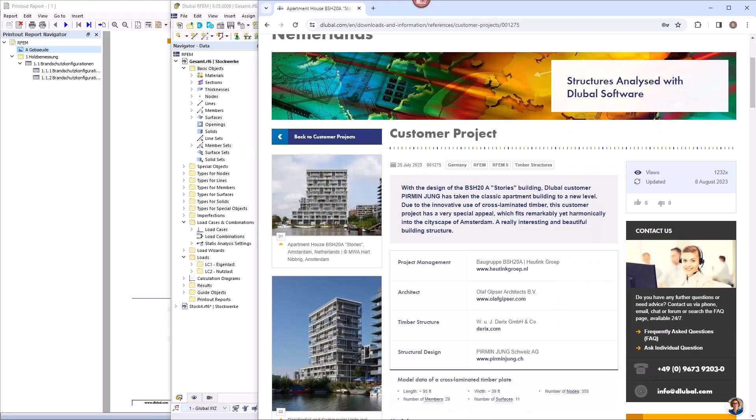I will shut off the camera and jump into the program. Before we jump into the program, the project I want to show you is also on our homepage under customer project. It was built last year. The static analysis has been done by the engineering company Pirmin Jung. They're using our software — that's the key.

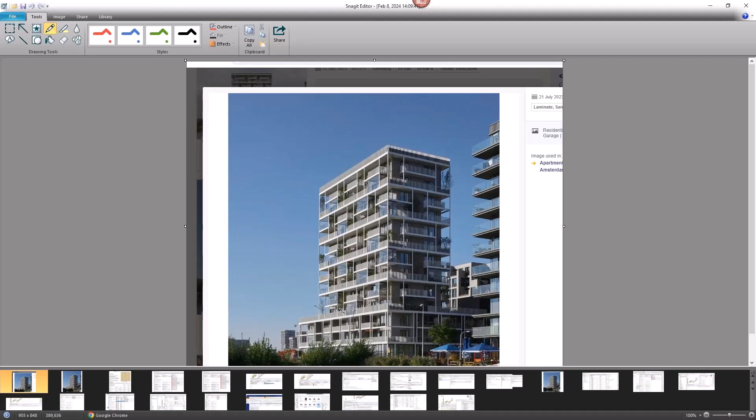This is the building, 13 stories. The point we want to take a look at today is that there is, or what makes the building quite interesting, is that there's a smaller part that is upon the bigger part, and we want to take a look at this story 3 here.

So how can you do this? You can first of all make it with model 3D and regard all construction analysis, stages analysis, all this stuff in the 3D model, or you can model it 2D, and then you have to connect each story via the option load transfer. This is the option that I'm choosing here today.

Today I'm only looking for vertical deformation forces. I'm not looking for horizontal forces for the stiffening of the system — I want to do this in a separate webinar later this year. Today, only vertical deflection and vibration, so wind load and earthquake we will not consider here today.

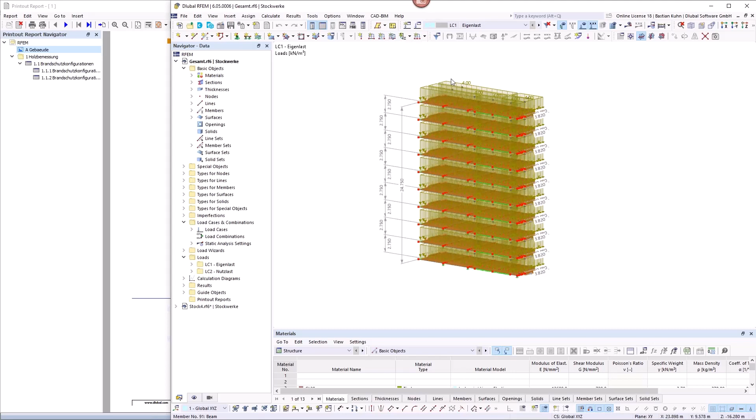As I said, I want to calculate that in a 2D structure, but with 3D effects. Just to give you an imagination of the structure, I copied the top stories 4 to 13 into a separate position, making a simplified load case there for the self weight, 4 kilonewton per square meter, and the live load 2.25 kilonewton per square meter in each story, giving approximately a height of 25 meters for stories 4 to 13.

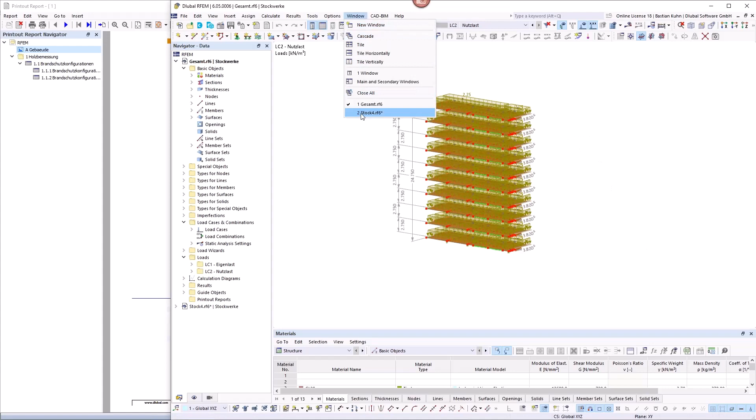Now, how can you get the force from story 13 to story 12 and so on? Therefore, I created separate 2D positions. Here is story 4, and I summarize them all — I want to show you that in the Windows navigator.

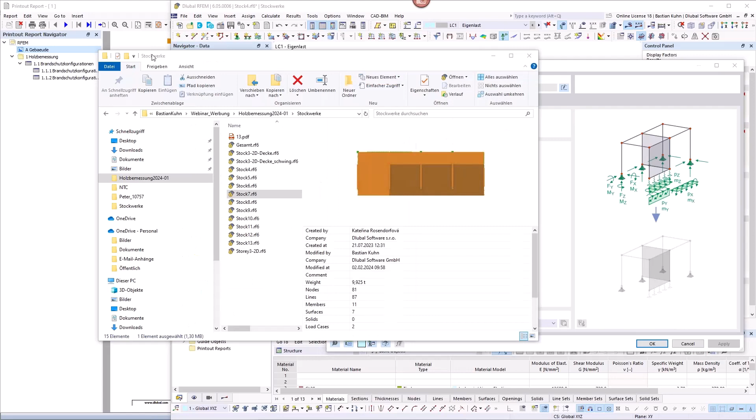So I have here story 4, story 5, story 6, 7, 8, 9, 10, up to 13, and connected the forces from the top story above story 4 via the function import support reactions. There I can say I'm connecting story 5, so the resulting forces from story 5 go into this position, story 4.

Then I can say in the model with story 5, I have support nodes, support lines, and I'm importing them to the current model right here. I can automatically transfer the load case from load case 1 to load case 1 in the new story, and so on — this is how it works.

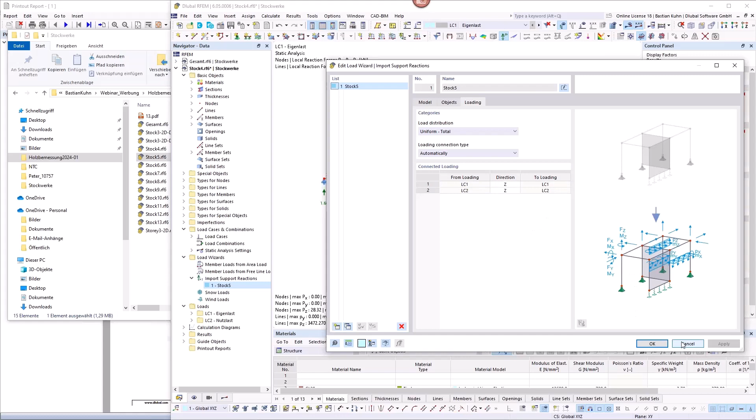I will put on the forces or the load, and here you can see that I have point loads and line loads, and if I activate it, I also have surface loads — this is, as I said, the 4 kilonewton per square meter for the self weight and the 2.25 for the live load.

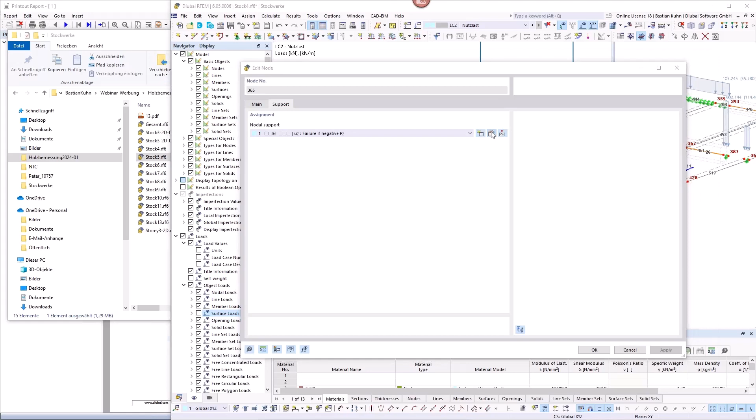But we just want to concentrate on the load that's coming from the other stories. You see here that in this part I also defined nonlinear nodal support behavior. It would also be possible to regard the settling or the construction stage via a spring constant in here. All these points would be possible to be regarded and still transfer the load from one story to the other.

Okay, now when we go into the position that we want to analyze today, I think it gets much clearer, because I know it can be quite confusing, especially if you have not seen it before and did not work so often with RFEM 6 before.

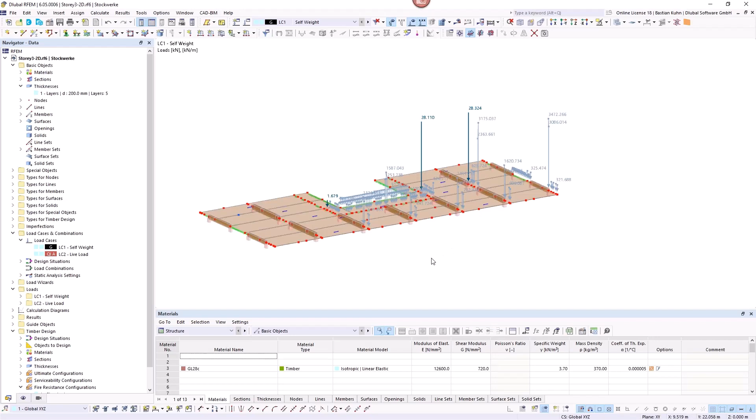You see here, I'm in load case 1, self-weight. Also here, when I activated the force in the first load case, 4 kilonewton per square meter, and 2.25 in the second load case. These are the only two load cases I want to analyze today. I said it is a simplification today.

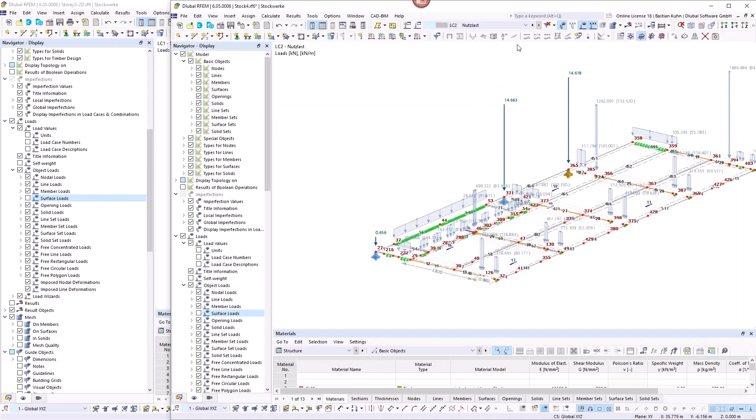Okay, I think the easiest way to regard that, or to understand what I'm doing here, is to take a look at the point load. So we have 1.68 here and 28.11 there. Now when we look to the previous model from story 4 and take a look at the reaction in load case 1, you see that I have 1.68 here, and if we turn it around, 28.11 here.

So that really is the load transferred from this model into the other. Maybe we take a look at the line load here too. So 591 here, and then I think it should be enough. And right here, you see also 591. So yeah, that fits. The load is correctly transferred from story 4 to this part that we are analyzing here.

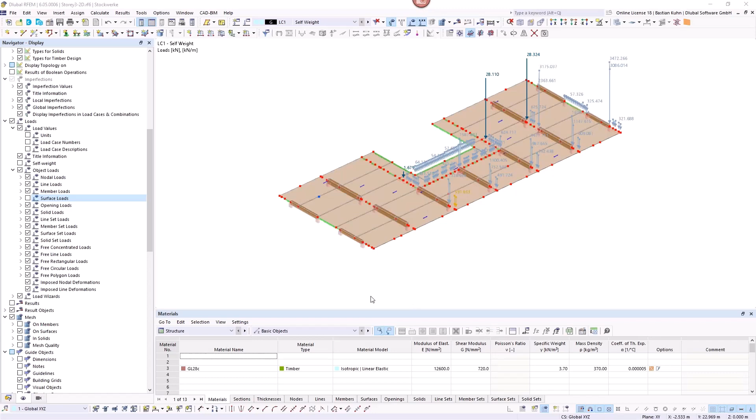Okay, to the structure itself. Now that we have such a whole bunch of questions already, it's hard for me to follow them all. All right, there they are. I would like to show you also the dimension of this structure that we are analyzing today. Therefore, I just shortly switch them on. It has a length of nearly 30 meters and a width of 12 meters.

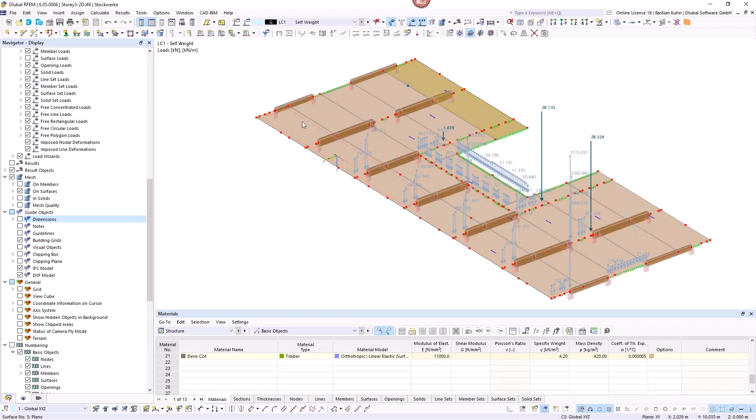I have several CLT plates in here. They are divided in an order so that they can also be produced and brought to the assembly. That's essential, that this is possible. And they are connected in between those connecting points via screws, and the screws in our software are modeled via line hinges. There's another webinar where I get into this much more detailed and also use a script function to calculate them. But today I just took the spring constant over from the existing project. So in X and Y direction, I defined this spring in here. So that's why it's connected.

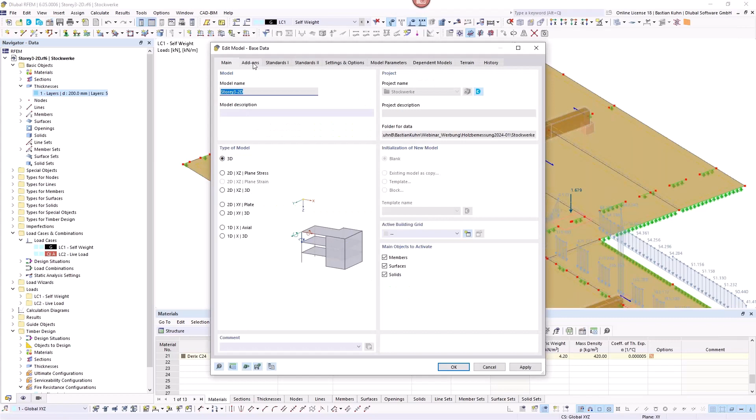The CLT plates themselves I generated with our add-on multi-layer surface. Maybe I go a little bit into the base data here. So it will be this add-on multi-layer surface, and I'm designing all this stuff in the add-on timber design.

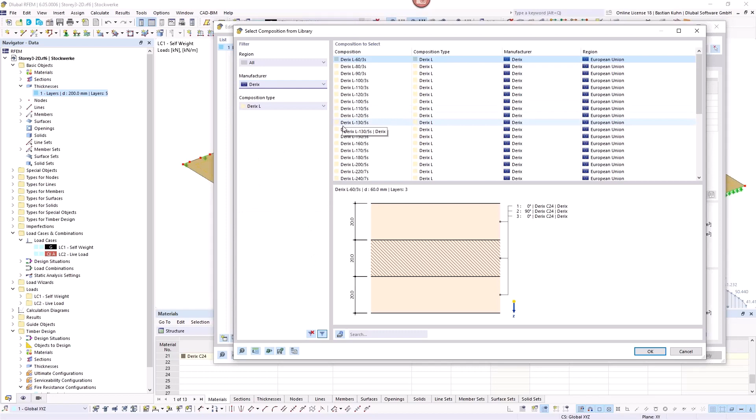And when I defined this layer, I have a database here with all the producers that we are offering right now. So you see, it's even possible to have a producer from Switzerland, maybe not this one, Schilliger, for example. But of course all the European producers. And if you want to design in America or North America, Canada, then you can also have producers from there. Right now here, I choose the plate from the company Derix. And this gives me a certain amount of stiffness. I have other options here to regard the failure of net sections and failure in glued contact surface.

This is once again more for the webinar of the stiffening system for horizontal load, and I don't want to regard that today. But what I want to show you is that these layers here will generate a stiffness that we export into RFEM. So you see that this stiffness, if we're just looking for the top bending elements in here, D11 is way more stiffer than D22. So the stiffness in X direction is higher than in Y. That's timber, right? Obviously, there's nothing so fancy and new.

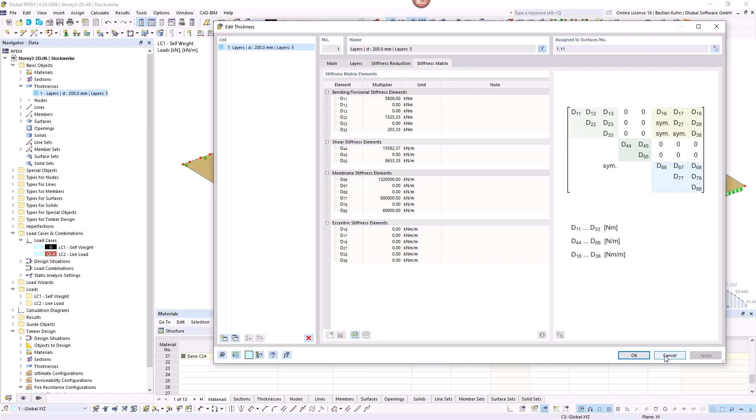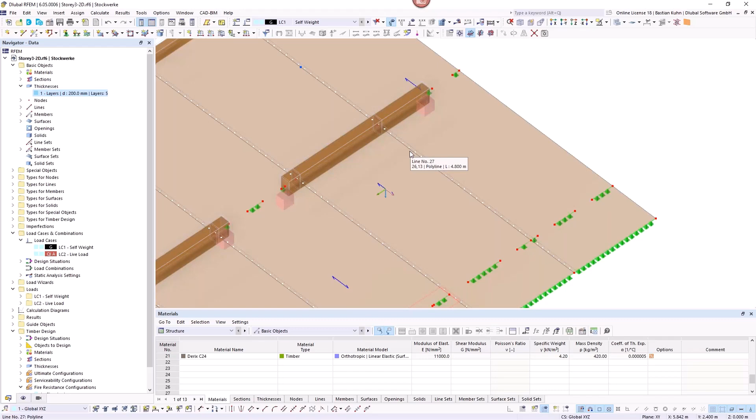But now when I'm working as a designer and constructing it, you probably already realized the blue arrows here. It was in previous versions always hard to know how I'm assigning the plates. If we look for the downstand beams that I have underneath those plates in here, you see that there's a downstand beam supporting this plate and this plate and this one. Because of this connection point in here, it would not be possible to design it economically without this part. That would be quite hard. At least with screws, it can be a problem. And therefore, this beam was arranged here. It's a continuous beam from this point to this point.

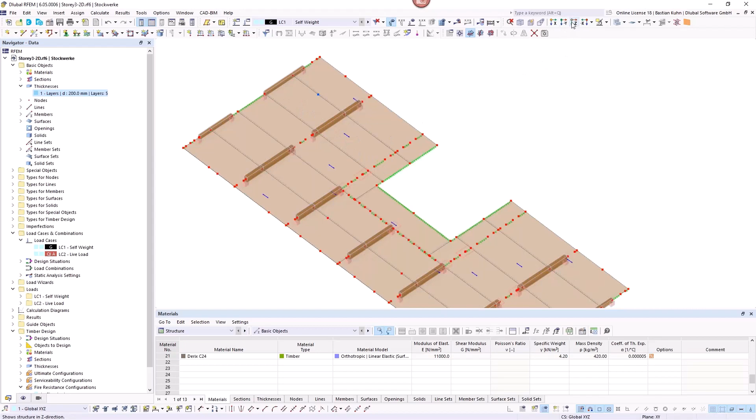And now when you want to arrange the stiffness, you probably say, okay, I have the span in global X direction. That's where I want to arrange my stiffness. So it's completely right what we did in here.

And we can also have it much more detailed if you want to look at each layer. I would just directly jump back to the thickness again, or maybe I can even have it here and then jump. So you see my first layer is oriented in 0 degree. The third one is in 0 degree direction, and also the fifth one. And this is then the red arrow here. And the soft layers of the structure, which has less stiffness, is then this direction.

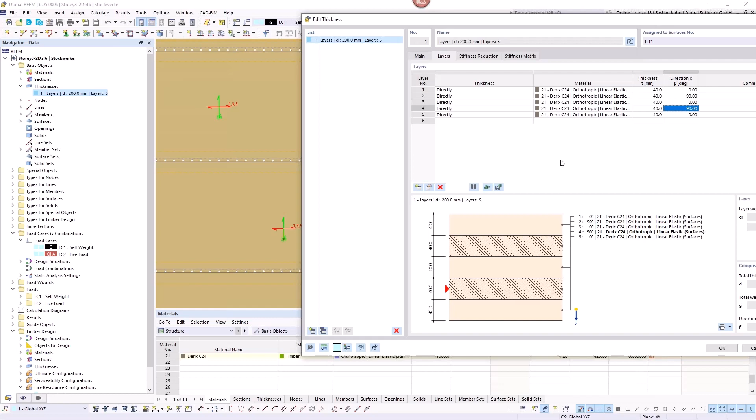So I don't want to get too detailed in it, but in a CLT plate, you always regard the stiffness in X direction. And because of the orientation of 0 and 90 degrees, you still have stiffness in Y direction. You saw that in the stiffness matrix.

So what I actually wanted to show is that you will directly get very comfortable with the stiffness direction, and then as a constructor, you can directly see, okay, here it's correct to orient it this way, but here probably not, because there I have supports completely here over the whole length, and I also have supports here, and there I definitely want to change that.

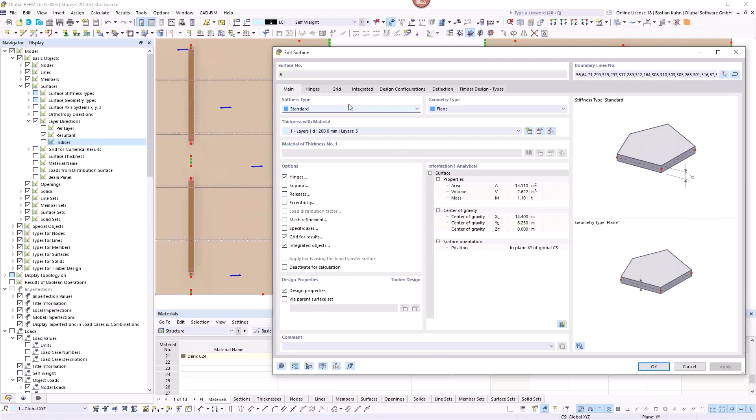How can you change this? If you assign a specific axis and define it here by 90 degree, the whole composition is changed and you see it directly that the stiffness works.

All right, that is the plates. I also defined supports, well, just simplified, also only vertical and movable in X and Y direction, because I think this is, as we are only looking for vertical forces and deformation, this is okay.

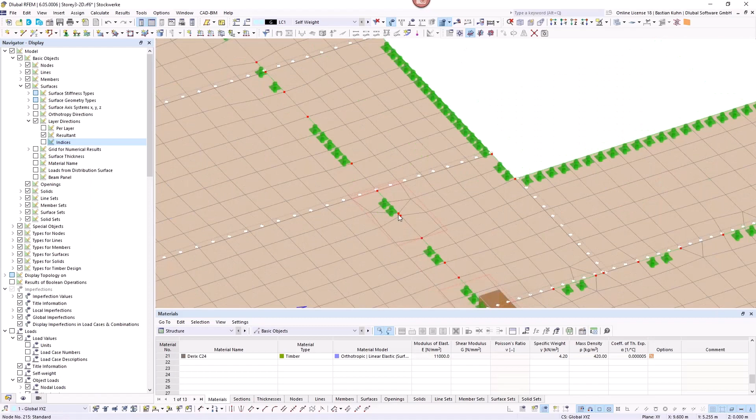I will generate the mesh just to show you another part of what I made in this model. I did take the whole load, once again the example of the point load of 1.67, and defined it with a tiny little eccentricity to the support. In reality, when you are constructing this, you probably do not assign it to this node. What's the number? 439. You would probably assign it to node 215. But I did it this way, and this will definitely give you a singularity, which will never occur in real life. And either you can put the force directly to this node, or if the distance gets bigger, there's also the option to define a surface result adjustment.

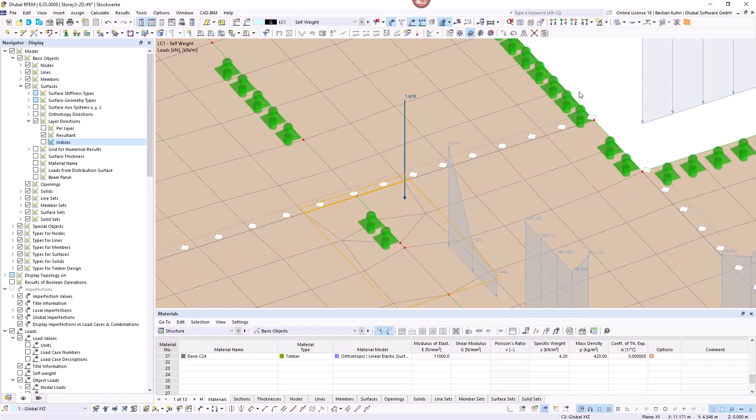This is what I did in here. And I use this surface result adjustment wherever I have these problems. But I want to show you with this the advantages of this 2D system. When I have it in 3D, it could be quite a lot more work to regard it. And also when you say, okay, a downstand beam here, maybe I don't want one, this would also be easier in this position.

Okay, we switch off the load again and come to the beam forces we did. The beam is supporting the plates because they have connection points in here. Otherwise, it would not be possible to assemble them, or to produce them and assemble them. Both would not be possible. And of course, the engineer divided the beam at these connection points. It is not necessary with RFEM 6 to divide it, but he did it.

And now, how do you regard that as a continuous beam? You will use the option member set.

Okay, when we are already in member set, we can directly take a look at the design types of this beam. We don't want to look for stability today, as we do not have any kind of buckling. And we could also argue that for lateral torsional buckling, it does not play a role here because we have constructive fixing on the top of it, so this will not occur.

That brings us directly to the design configuration. Well, the ultimate limit state configuration is then also not so much to do. You can consider the system strength factor. That would be something probably quite relevant in case we get right to the borders of the loading with the members. As I said, stability we do not do, and we have also the system strength factor for the surfaces.

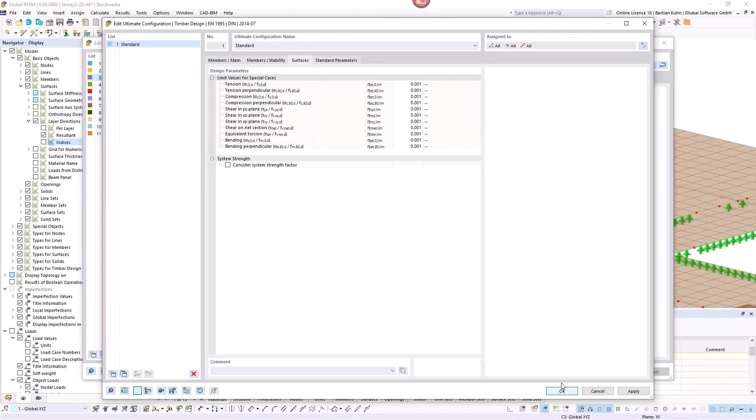So it's always divided into ultimate limit state, serviceability limit state, in the definition of member and surfaces. It's more or less the same what you input here.

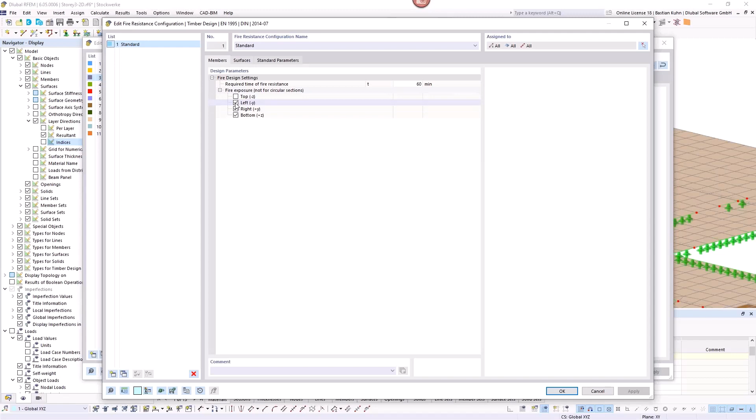Fire resistance verification configuration, that is the new point I want to show you for surfaces. Therefore, I will not show that in the members right now. For the member, I want a required time of fire resistance of 60 minutes. And because it's covered on top by the plate, I skip that and say it's only burning left, right, and bottom. And 60 minutes, that's what I'm defining.

Then what else can we define for the beams? We can define a member support at the member start and end in this case. Here I said, okay, I have a support length of 30 centimeters, which is quite long.

Possibly you want to reduce that later on. I'm using shear force reduction that I can always activate. In case I have a shorter support length, I would maybe also want to reinforce the support via screws or with a user-defined strength. All this would be possible. And in order to regard the softwood, I can also increase the factor KC90 by the factor 1.5.

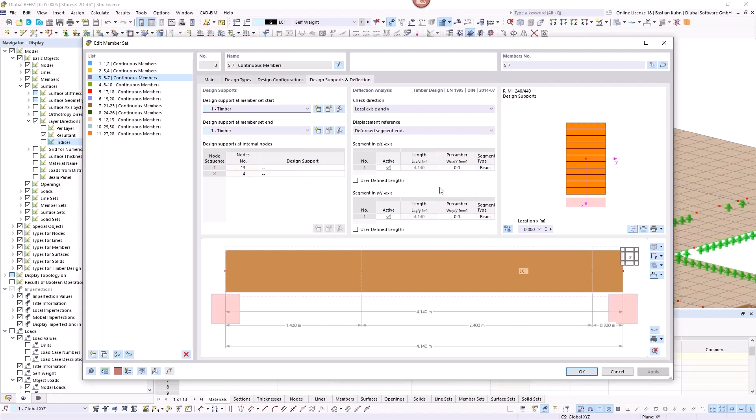Deformation is nothing I have to do much special on today. I'm just using the reference lengths. I will come to that when we look for the surfaces. And we will take this one here, this surface, and take a look for the design configurations again.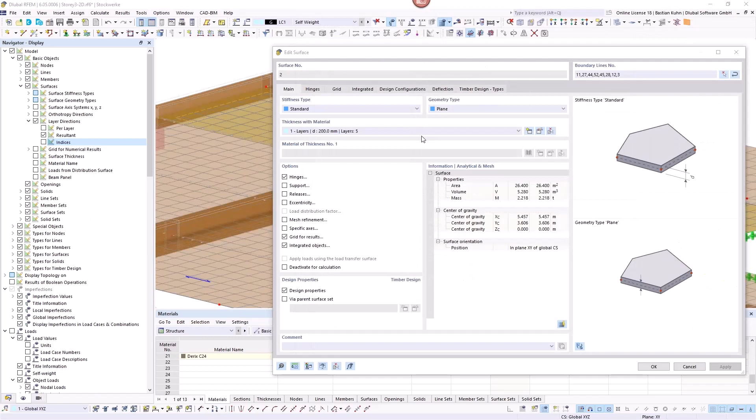The information on the thickness I showed you already, just so that you know what we are defining here. We have these reduction factors in here, which play a significant role for the design. That is all transferred into the stiffness of the structure. Okay, ultimate limit state, serviceability limit state, I showed already. There's not much special to say, but fire resistance.

This is the main reason that we are doing this webinar here today for you, because we are really happy that we are able to regard fire resistance verification for CLT plates now, and we can regard it correctly with correct reduced stiffness and all these points. I will come to that once we did the verification or have the verification ready.

So I'm saying I want a required time of fire resistance of 90 minutes, which is quite long. And the default setting here is non-heat-proof glue, not the glue, but the adhesion of cross-laminated timber, which means this is the standard glue taken by the producers. So be aware to take this one.

And the burning rate that we have in here, we can also control that in the standard parameters, and it's probably quite interesting to take a look into that. The burning or charring rate is for cross-laminated timber similar to softwood, 0.65 millimeter per minute.

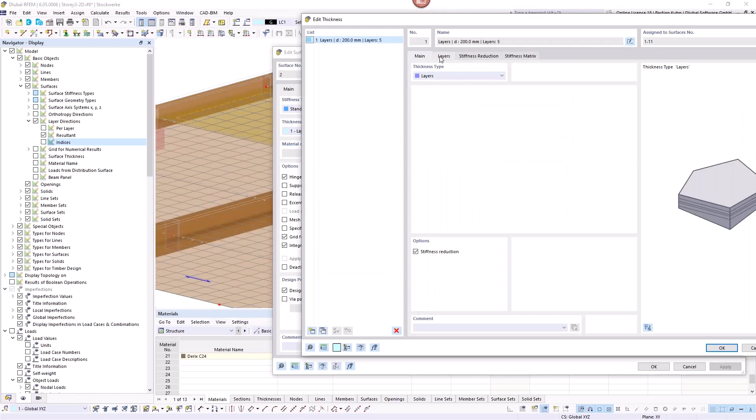In case one layer of the plate is burned nearly completely, maybe we take a look at the layers again. So if you say, okay, the bottom layer here, where I am with 4 centimeters thickness, is burned completely, then of course it cannot bear any force or stress anymore. And then there's also the rule to say, okay, when it's burned equal to or less than 3 millimeters, it has to be completely skipped out of the design for the stiffness and the stress.

So that's quite important. Okay, and we want non-heat-proof adhesion. The fire exposure, well, that's now quite similar to what we had for the members. On the top, I probably have some kind of planking or whatever. On the bottom, that is where I want to do or have the fire resistance verification.

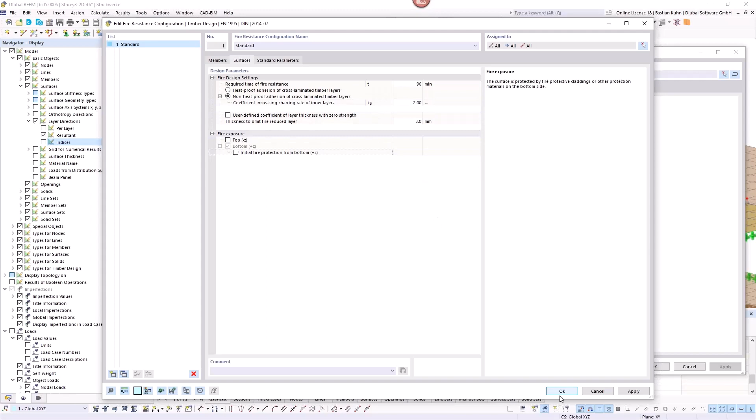In case the bottom is also planked by, for example, gypsum or something else, you can calculate an insulation coefficient according to, once again for example, the planking thickness, and then the factor K2 should be less than 1. But here today we say, okay, I'm working with this and we will try this one. This is the very important fire resistance, and we will do the combination, do the design, and then come definitely back to this configuration and take a look on it again.

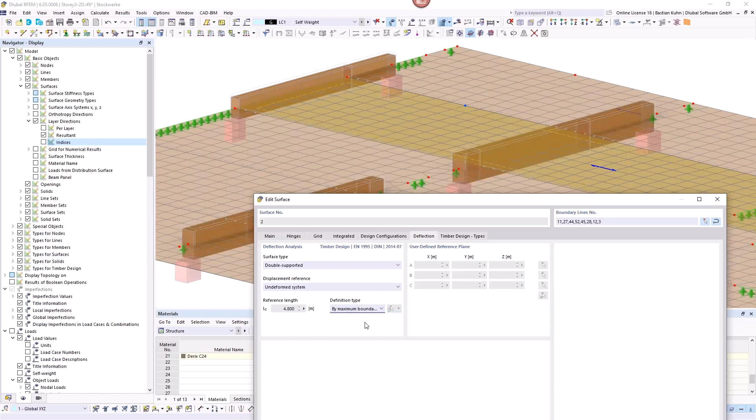Deflection was predefined with the maximum boundary length, which is all right in here. It's from this to this point, 4.8 meters. Of course, and in most cases you would want to have it, you can also select a length, but you see here this line is 4.8 meters, so you can really take it this way. Okay, and the service class is similar as for the downstand beams, 1 in this case.

This is the point, and we will get to the combination. I hope I did not miss important stuff, but I don't think so. Okay, we're doing a combination according to Eurocode 5 with the German annex.

Of course, a whole bunch of other annexes are possible, and a whole bunch of standards for any other country is possible here. Once again, we have only load case 1 and 2 for sake of simplification.

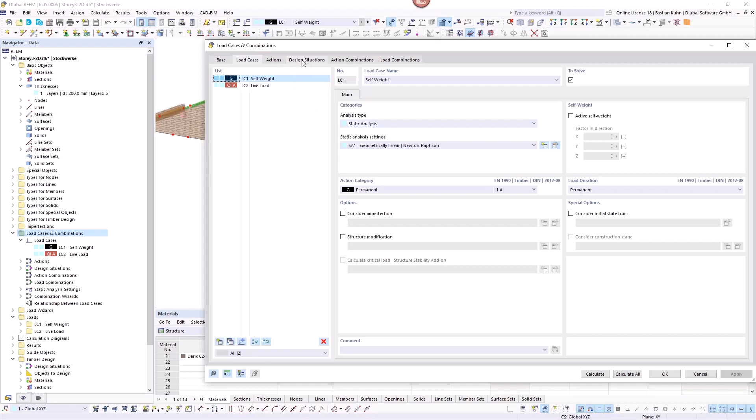Design situation is predefined with permanent for ultimate limit state, and in Germany we have 3 combinations for serviceability limit state: characteristic, which is the initial deformation of the structure, and quasi-permanent and characteristic quasi-permanent with regard to the creeping. So these 2 serviceability limit state verifications will also regard creeping.

The creeping you can define in the basics with settings for timber structure. In case your structure gets nonlinear, you have to regard the creeping factors in stiffness modification, but we do not have this case here.

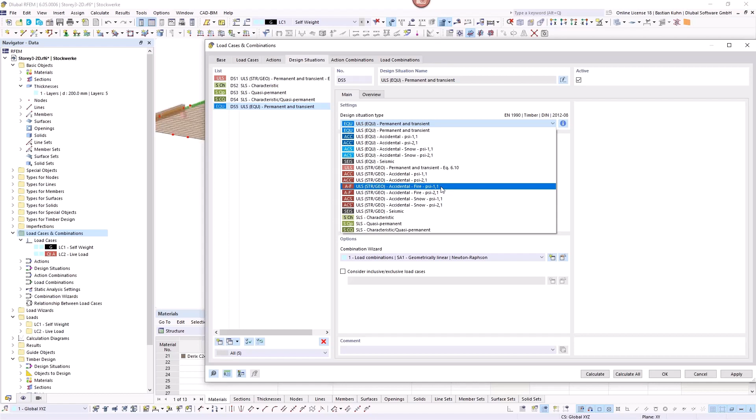And of course, we also want to do fire resistance verification. Therefore, once again, in Germany, it is recommended to use the accidental combination for fire with Psi11, which means that your factor Psi11 is put in front of the summation.

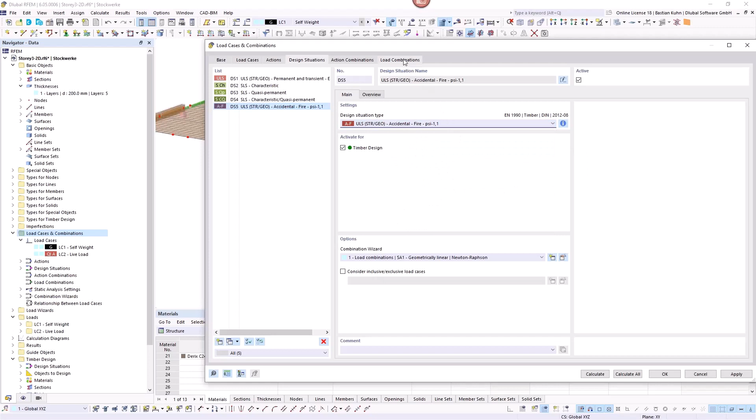But of course, it's also possible to use the other summation where you have it in the summation of it. This is the one we are using here, and then we can do our combination - quite short, not much to combine when you have only 2 load cases.

The only thing left to do is go into the timber design and say what you want to verify. We want, once again, verify ultimate limit state and serviceability limit state. Here is correctly assigned the accidental fire, vibration we will do later on.

I let the software now calculate, because this gives me the opportunity to show you the printout report a little bit more detailed. But maybe you already asked yourself, okay, it's nice that I can connect several models within one model and have the forces from all of them, but how can I do the documentation of this?

I mean, I cannot say to the other engineers, I magically just have the forces somewhere here. You probably need the documentation for this. And that is what I want to show you during the calculation.

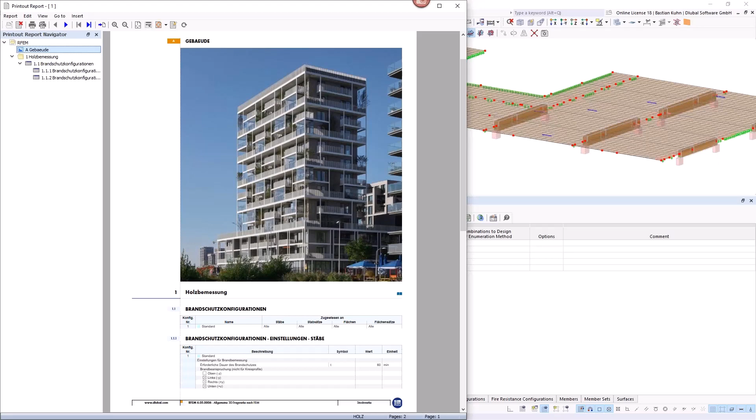Here I'm opening again the model with story 4. And here you have an option - what you definitely want to have in your documentation is the reaction force from the story and probably a whole bunch of other parts, but I don't have the aim to make you a complete printout report.

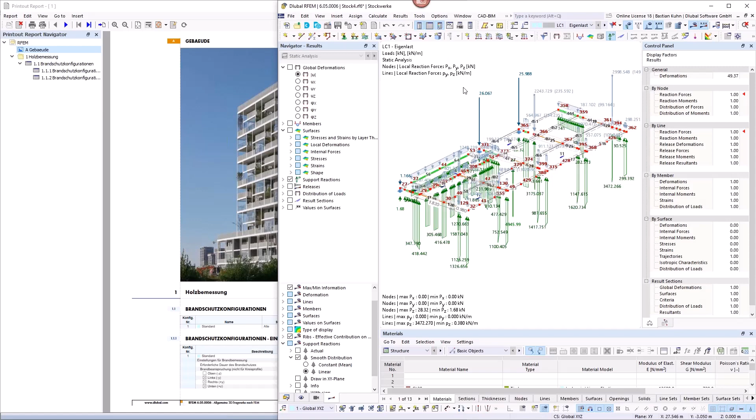I just want to show you how to connect several parts of the other model into this one. So let's say we have this story 4, and once again, this is connected to story 5, 6, 7, 8, to all the other stories. This is something I want to print to the clipboard. Then when I go into the printout report from the model where I'm working on, I can say, okay, this is from story 4, say okay, and have it imported.

While it is loading, I can, for example, open another model. Let's say this one - maybe not so interesting to have, but let's say we want this with 25 meters and each story also into the global printout report. You can have that here.

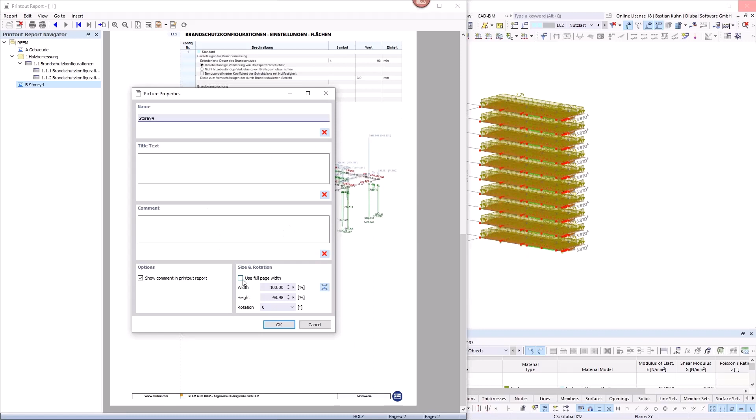Of course, right now it's not over the whole front, so this is something you always can change via right-click properties, maybe no comments, whatever. So this is all possible.

And one other point that is possible is to say, okay, I don't want to have it from another model, I want to have PDFs and unify them into one big printout report. This is also possible in here.

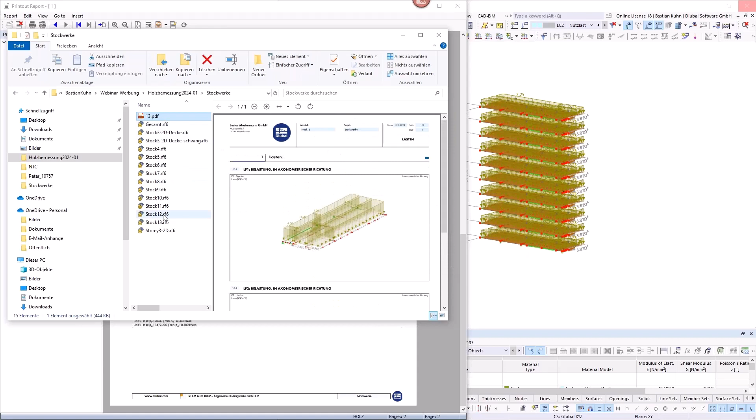For example, I'm just copied the load from story 13, so the top story. And when I go once again, insert PDF and select this one here, go opening, and for example, I say all pages. There is a whole bunch of options. Import it, and then I also have this PDF inside it.

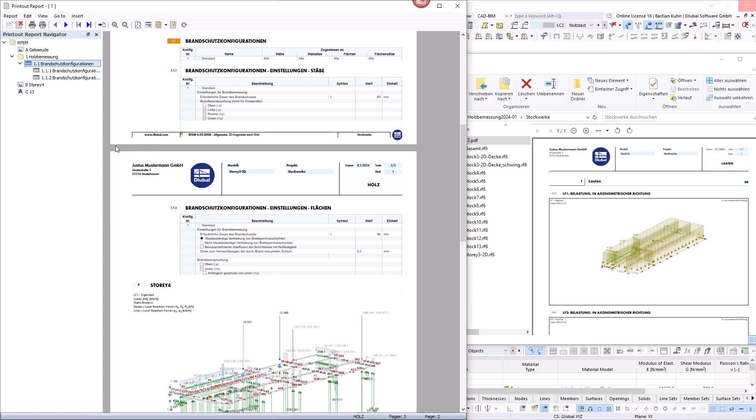These are the options we have for the printout report. Maybe just, I don't want to take a too detailed look into the printout report, but of course, when you go into the settings of it, you have all options to, for example, regard the fire resistance configuration.

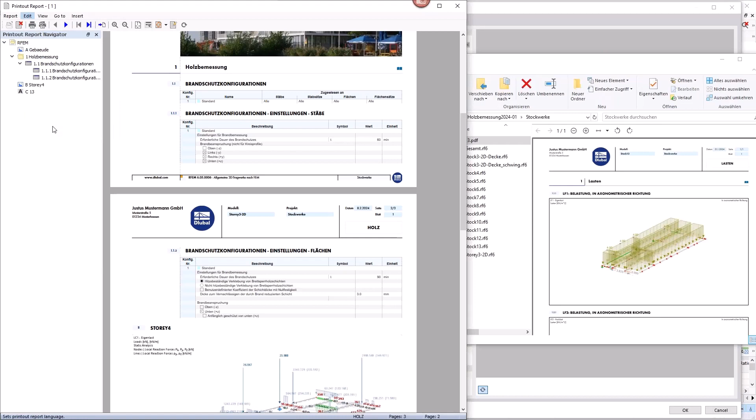Oh, sorry, this is in German, this was my fault. Once again, so we probably should change the language into English. But this is also possible, similar to the software - it's also possible to change the language.

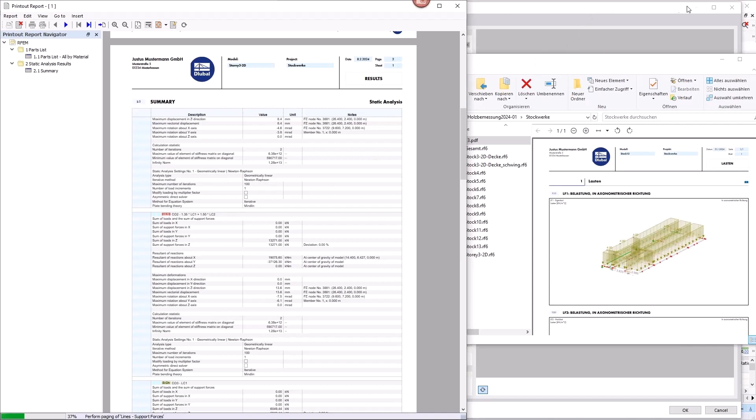Yeah, that's because - so here you see, now it's there. And we have the language in English. So that's also possible. Okay, so that we don't need.

I think the calculation is now ready. Yes, so that's fine. Now this is loading all the points to the printout report. That was maybe not the smartest way of doing it, I should have left that. But we can maybe wait a few seconds.

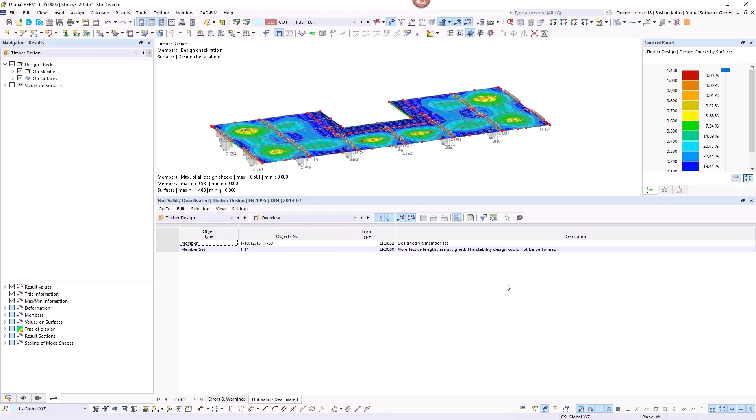Now it's ready, because it was loading all the stuff into the printout report that I should have skipped. So the design of the structure is ready. And the overview at first says, yeah, not really a bigger problem. When we look for the design ratios on the member, that looks quite okay in here. We can also take a look on it graphically.

Let's take a look at the biggest loading for ultimate limit state. This is the bending, and we can also take a look at the compression, just as an example. So you see, 50% loaded. The length is definitely too long that I chose here, and maybe we can also decrease the size of the section. Anyway, here's the pressure support verification done, and you have an equation that you can put into the printout report.

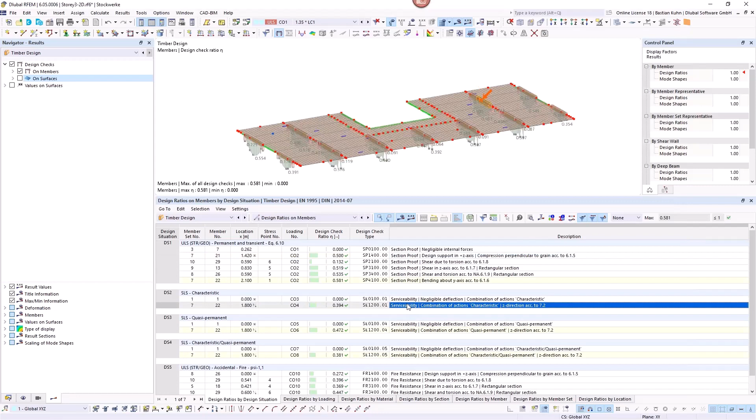Then have a nice documentation of it. Serviceability limit state, without the vibration, is also not really a problem here.

And for fire resistance, we also take the biggest loaded beam. I think it's always interesting to see how this is done. So the original height was 32 centimeters with a width of 16 centimeters. Because of my burning rates and fire exposure on the sides, it is reduced to 6.2 centimeters and a height of 27.1. Then the verification, in this case for bending, is done again with this reduced section.

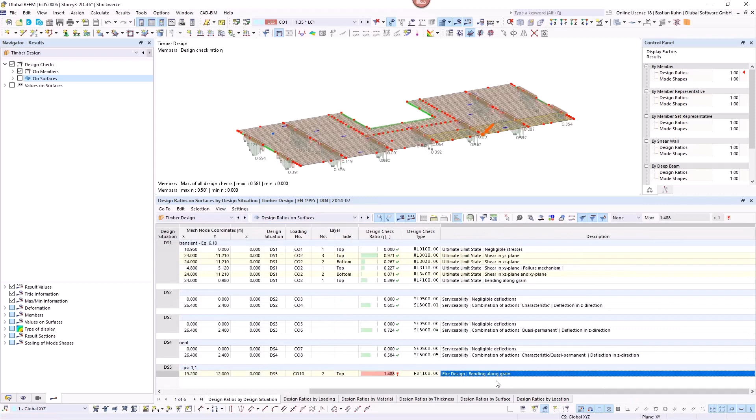Okay, that's the beams. Now we will jump to the surfaces. And here you see already, the fire resistance doesn't look really so nice here. I mean, it's only a small part of the structure. Hold on, we will get the graphics on again because I skipped that.

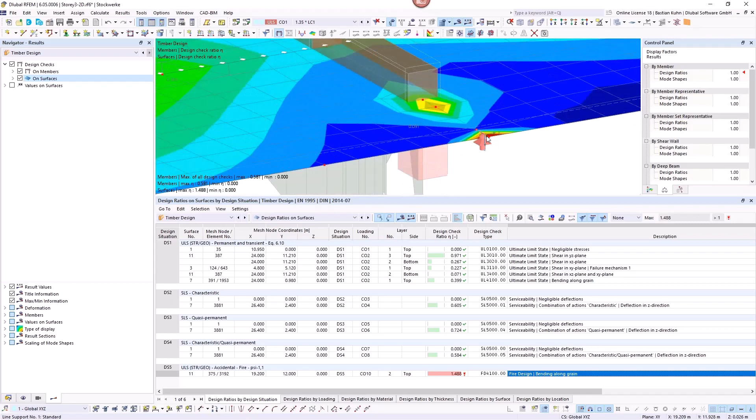There can also be defined an average region or a surface result adjustment, just like I did in this part here. That would definitely be possible. I'd say 20 to 30% is something that is probably possible to have, at least if it's such a tiny high peak here. It's something you can always do, but I want to try something different here.

Before we do that, let's take a look at the other loadings here too. The shear for the punching-through area is design-giving in this part. That's the usual punching-through area you want to take a look at.

We can maybe also take a look at the stress over the whole section, because I think that's always nice to see. And you see for the bending, how the stress is transferred into each layer of our section, or our surface.

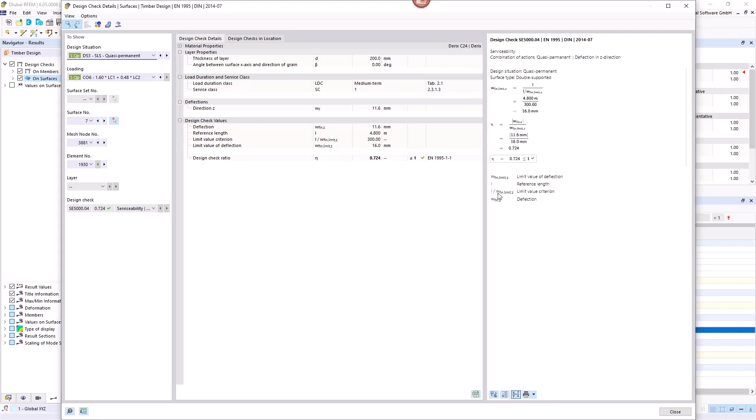Serviceability, that's just deflection. We can take a look at the details too, but I want to show you that via the vibration analysis later on. You see, we take the limit deformation of 16 millimeters and use this for dividing the existing deformation in this serviceability state.

And that brings us to the fire resistance, where we have this high overloading. It's quite interesting when we look at the result diagram that I showed you for the ultimate limit state before, because now you see our intelligence behind it.

You see, because of the burning, the fifth and the fourth layer are burned completely. And this is not only for the stress, but also for the stiffness. The stiffness matrix that I showed is reduced for load combinations 9 and 10.

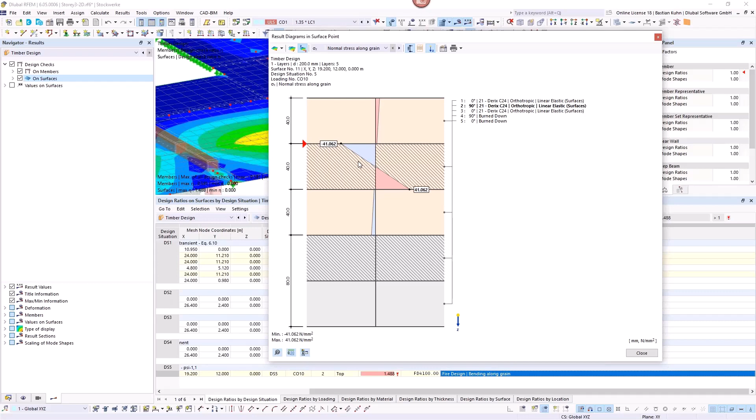And yeah, you see, of course, now I have only one layer here taking stress, because the other ones have zero stiffness in this direction I'm looking at. So that's, of course, the worst case that could happen.

So 90 minutes with this glue I'm using here, it will never work, I think. That's just quite too ambitious what I tried. Nevertheless, before we change something, we will...

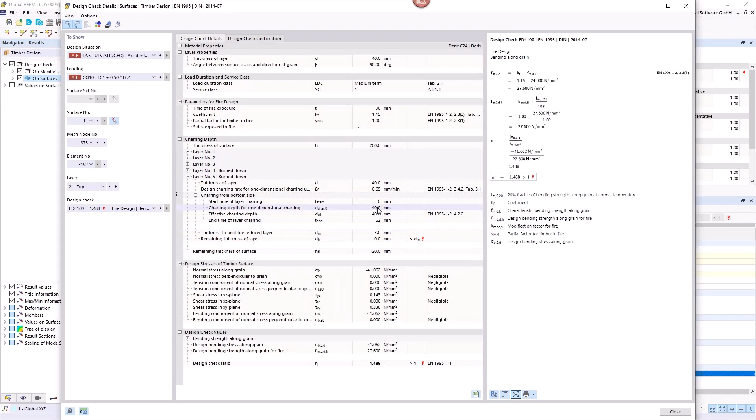Use it again here and take a look at the charring depths inside. Layer 5, as I told already, is burned completely, of course - by 90 minutes, there's nothing to talk about. But layer 4 can be quite interesting, because I usually had a remaining thickness of the layer of 2 millimeters, but because of this rule I just showed you, it is burned completely now and has no more bearing capacity. So it's defined to 0.

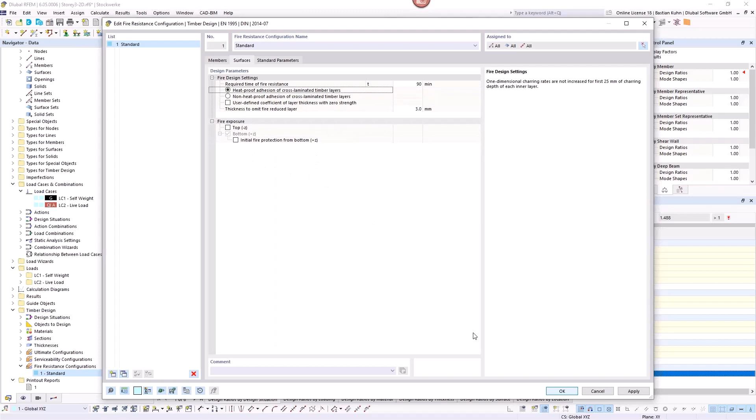Okay, you probably expected what I'm doing now, because I introduced that a long time ago. The easiest way to increase this now is to use a heat-proof adhesion of cross-laminated layers, because now I don't have to double the burning rates. And you probably saw that it tells me it needs to delete combinations 9 and 10.

Why is this necessary? Because the stiffness in combinations 9 and 10 is also reduced by this new charring rate. So we have to export the stiffness matrix for this combination back again into the program, get the inner forces, and calculate it again. And hopefully now we cross our fingers. We hope that it will work.

Okay, it should usually not take that long, because we only have these 2 combinations, and also for the timber design or timber verification, it's just in brackets the fire resistance where we need to do the stress analysis again. Still, I know there are a lot of parts to be verified.

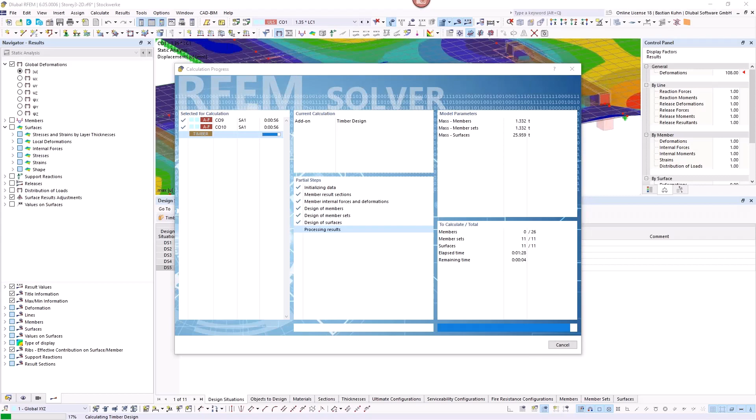Yeah, and there we are already. I'm just scrolling a little bit through the questions, but Gerhard answered them all, and there's not really much coming doubled. What can we take a separate look on? No, I can't really see it. Okay, but there we have it. I would have shown something else, but now we have the results.

And then we directly jump into the surfaces and look at the fire resistance. And yeah, perfect, you see I nearly have 100% less loading on the structure, because of this better glue that I'm using in here. And now we can also take a look at this graphic again, and now you see it already: 14.5 millimeters do remain. And when we take a look at the stress, this bottom layer just gives me so much more load bearing capacity, that it's just the smartest way to do it for me.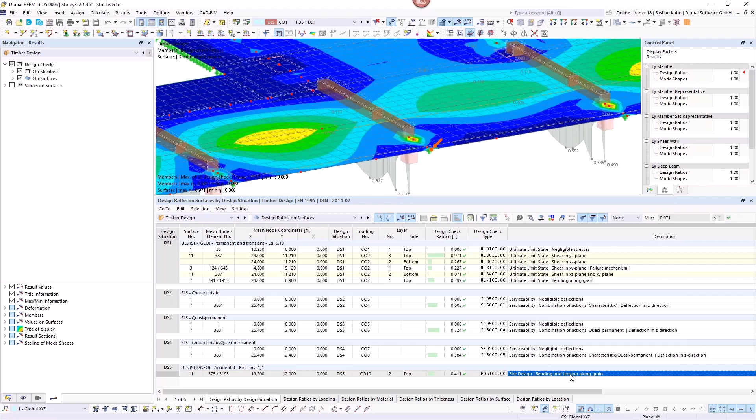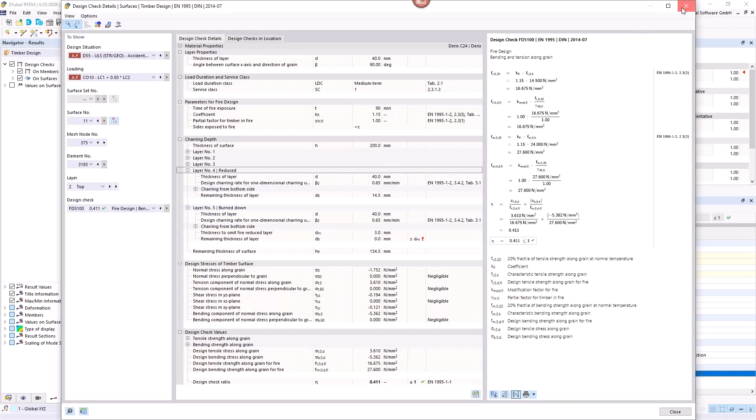In the details you will definitely see the same, when you go to charring depths, and then you see here that this is still working. So once again, this is really a big jump. I don't know a software out there that is calculating 2D surface elements, assigning a fire resistance verification by also reducing the stiffness. There's probably some software that will reduce or have the reduced section, but they will not reduce the stiffness, and it's quite important if you look for the effects it has in here.

So that is what we are very proud of, that we have it in our software now, and I think it's one of the best things you can have. Okay, this, and now was only missing the vibration analysis.

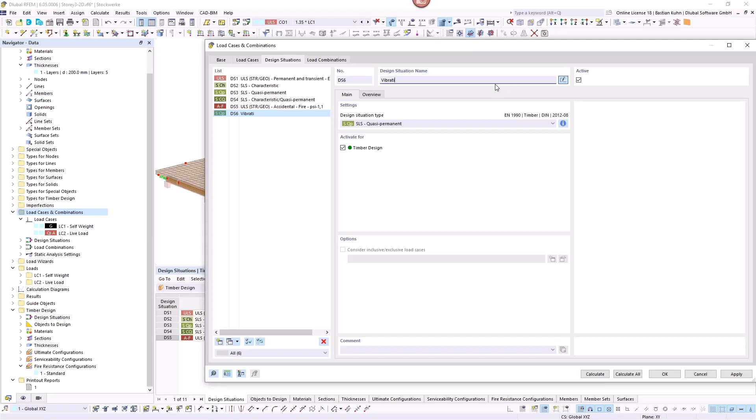I want to show you the simplified vibration analysis as a first step. Therefore, I'm shutting off the combination wizard and will just define one more additional design situation for vibration, and have in the load combination also one more load case that I'm assigning to this, with 100% of the self weight and 30% of the live load, right?

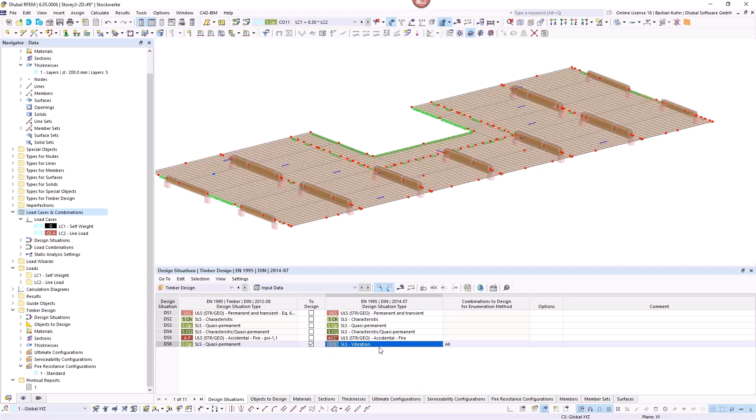And I don't think you want to see the calculation again for all the other objects to design, so I'm just doing the simplified vibration analysis again. You see, now I have only one combination and only deflection that I'm showing in here, so that would be quite good and quick. That's the point I want to have in here.

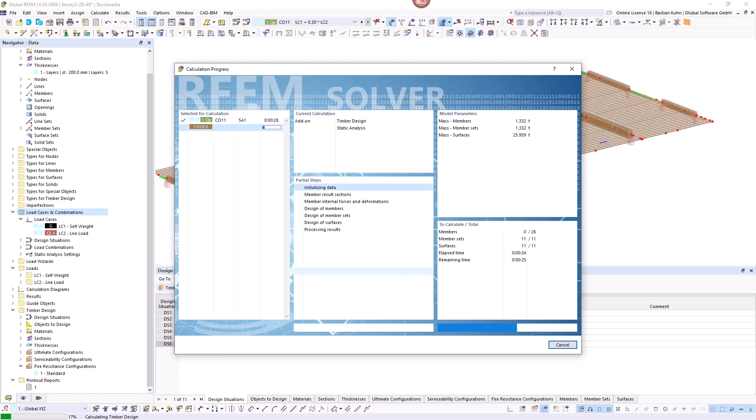The simplified vibration analysis is similar to the SLS verification, looking where the biggest deformation is, and this is divided by the limit deformation of 5 millimeters. I showed it to you in the configuration settings, and you see everything's red. That's not nice.

If you look for the members, there's not really a problem in here, but of course for the surfaces in this area and in this area, you have the biggest overloading. You have 44.8% overloading of it. Now, how can you deal with that?

There are several ways to do this. What we here in Germany do most of the time is the analysis by so-called Hamm-Richter. What does that mean? It means that we are calculating the frequencies of the structure.

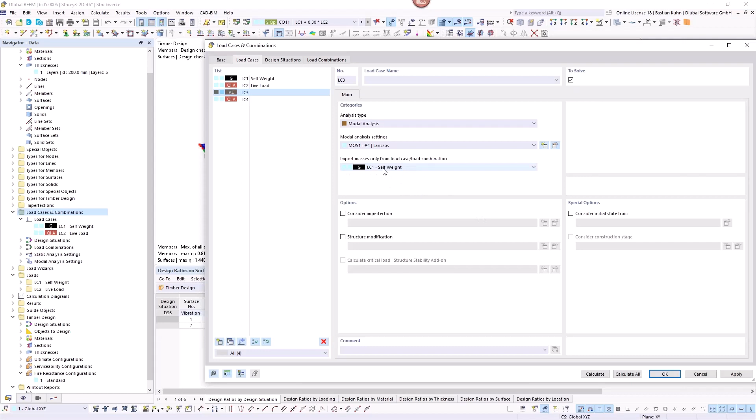Therefore, I'm copying or assigning a new load case and give it the analysis type modal analysis, and import the load case 1 as a mass in here. And I need another load case for the stiffness criteria. This is the way how this is done.

I will just show you what it means. So when we look for the modal analysis in load case 3, we will calculate the frequency or the hertz of the structure.

Now, in this method there is a rule that when you are in independent structures, you should be above 8 hertz. And when you are in dependent areas, so when your own family is introducing the frequency, you should be over 6 hertz. Okay, so that worked for the second rule, but not for the first one.

So you have 2 ways to do it. You can either get it stiffer, but it's not really in this problematic part, it's more in this part here where you can try to arrange something. But if you argue, okay, I have maybe a dependent area here, it is fulfilled at here. At least it is not

44.8% overloaded. And now the second criteria is the stiffness criteria. Therefore, in the maximally deformed part, you have to define a single force of 2 kilonewton, and it should be below the deformation level of 1 millimeter. And when this is fulfilled, your verification is done.

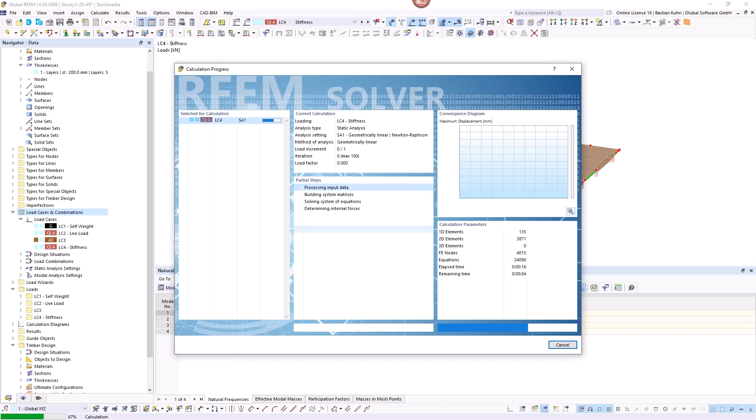Well, it requires that you have an option to calculate the frequency rate, and this method can be even more sophisticated than what I'm showing here. It would also be possible to analyze this with our software, but then you have to define a vibration on the structure and see how the damping works. As with these rules, we are below the level of 1 millimeter, so you can agree or argue that the vibration requirement is fulfilled and that it is okay.

Just as an option, because the simplified approach is really simplified - that's in the nature of such things. Okay, I see everything's answered, that's always good.

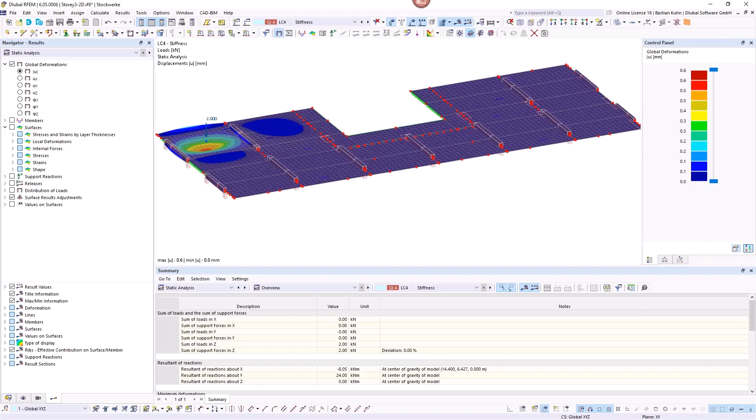And we will come back to the presentation because Gerhard wants to tell you a little bit about upcoming things. I already announced a little bit an upcoming webinar for stiffening, and Gerhard also has something planned for the future. Okay, Gerhard, the stage is yours.

Thank you, Bastian, and thank you for the webinar. At the end, I want to talk about new features which we have implemented in the last few weeks. So last week we released the fire design for surfaces - not only for CLT, but for all kinds of surfaces, for Eurocode design and for design according to the code from Switzerland, the SIA 265.

I will prepare a webinar especially based on the fire design, but I don't have a date yet, so maybe end of March or April or something.

Okay, so the next feature - sorry, you are too fast. Quick, sorry, yeah, no, because you said next. The next feature we released a few weeks ago is the profile sections according to our material database, also for the code from Switzerland.